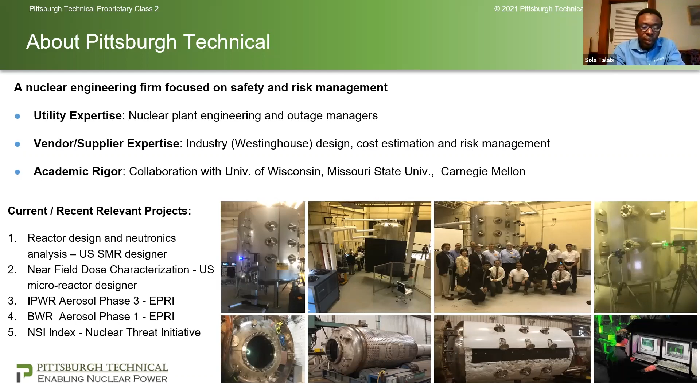Next slide, please. So for the project we're going to present on, the effort really has some significant context to it that we want to lay the ground and explain. One of the things we like to say is that we never want to do work that just sits on a shelf. So a lot of the research we do is driven by industry need, industry demand. And the industry demand here for this project is an ongoing effort to right size the concept of emergency planning zones for advanced reactors and small modular reactors.

As you may know, the Nuclear Regulatory Commission currently mandates two emergency planning zones. One is called the plume exposure pathway, which is approximately a 10-mile radius around each reactor site. The EPZ is the area where you need to have predefined and established actions in response to a potential accident. Some of the actions that can be taken within the area include whether or not you shelter in place, whether you evacuate people, having potassium iodide provided to inhabitants of the area, having special training for emergency facilities that are in the area, etc. So there's a significant cost actually associated with having an emergency planning zone.

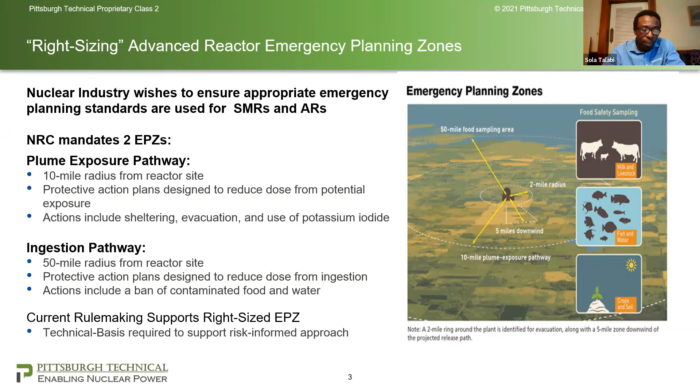And it's one that is necessary, but it should be risk informed, and the size should really be based on the risk profile of the plant. You don't need it to be any bigger, and you really don't want it to be smaller than it should be. It should really be informed based on the actual risk. So it doesn't make sense for a 1,000 megawatt plant and a 50 megawatt plant to have the same emergency planning zone size. But the way the regulations are currently written, it's one size fits all. So there's certainly a need to right size the emergency planning zones for advanced reactors and small modular reactors, to make them more competitive. Next slide.

So again, the context of this is within the potential deployment of a particular type of advanced reactor or small modular reactor, which is the integral pressurized water reactor. I'm sure that folks in the audience are familiar with the risks posed by a potential nuclear accident, which is the release of fission products. But one of the objectives of the containment vessel in a nuclear reactor is to ensure that in the event of an accident, those radionuclide particles that are aerosolized are contained.

So small modular reactors, and especially the IPWRs, have certain features that support the retention of fission product through naturally occurring phenomena. One of the ways we are able to demonstrate a different risk profile for these small modular reactors is to try to quantify the potential increase in retention capacity of these reactor types in the event of an accident, fission product. So that's really the objective of the study: to look closely at this reactor type, integral pressurized water reactors, and quantify the higher potential for retention, or as it's called, decontamination.

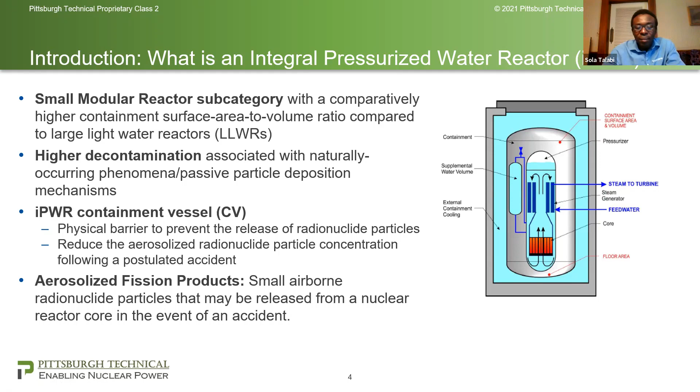Next slide. So the research was supported both by the Electric Power Research Institute and the Department of Energy. As we've stated, the motivation is to support right-sizing of emergency planning zones by quantifying passive decontamination factors associated with IPWR containment vessels.

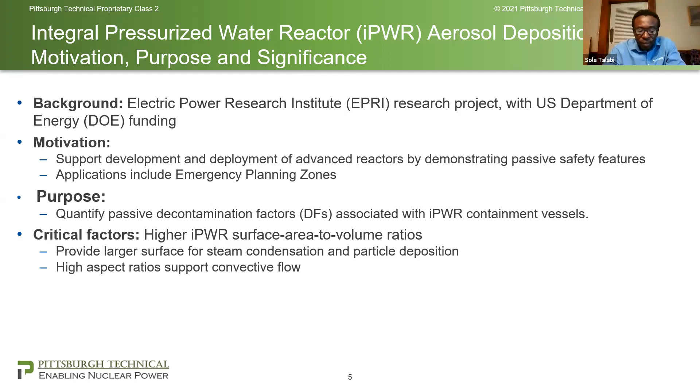Some of the critical factors here are the fact that there's a higher surface area to free volume ratio, and that ratio is significantly higher. So per volume, there's more depositional surface that these IPWRs have than large light water reactors have, even though they're significantly smaller, but the ratio of the surface area to free volume is significantly higher.

Next slide. So in terms of some of the significant benefits and impact here, some of the available methodologies and available data are largely based on large light water reactor technology, and as we'll show in a subsequent slide, these don't really scale appropriately.

And in terms of the impacts and benefits, as stated, the cost of maintaining an emergency planning zone is significantly high. So to support the development and deployment of these reactors, we really have to sharpen our pencils in terms of safety analysis and make sure that in various areas we're characterizing safety margin and ensuring that we're not being overly conservative to a point that it makes it too expensive to deploy the reactors.

So there is certainly an economic imperative here to support the development and deployment of these reactors by ensuring that the actual risk profiles are understood and that the safety requirements match up with the expected risk profiles. Next slide.

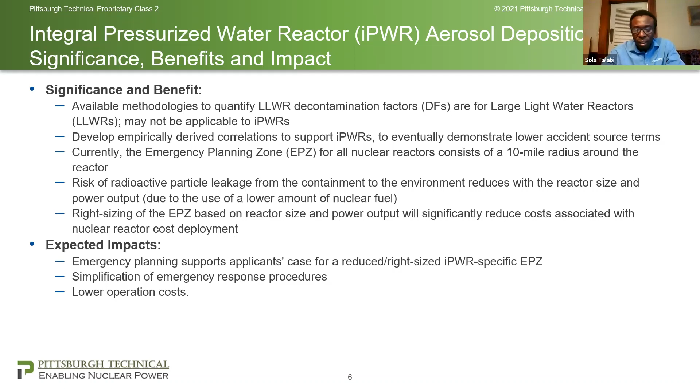So we've stated the objective, and just to explain the approach at a high level: to quantify the risk profile here, without going into too much detail, at the end of the day it's really a question of understanding how much potential fission product is released from a reactor in the event of an accident and how far it travels. So it's the dose-at-distance relationship that we're really trying to understand.

And based on that, the EPZ, or emergency planning zone, is sized based on that expected dose at distance. So just notionally looking at the chart here, prior to this work, if we try to quantify the dose at distance, we would have the red line, and the approach is really to try to characterize a green line based on the actual risk profile that the plant has.

The red line is a sort of one-size-fits-all analysis that was done back about 40 years ago with NUREG 0396. You can look it up, and there's a characteristic dose-at-distance relationship for all plants in the US. But what we're saying here is that if we characterize the IPWR-specific dose-at-distance relationship, we'll expect to come up with something that looks more like a green line. And then based on that, we can size what the appropriate emergency planning zone should be with these reactors.

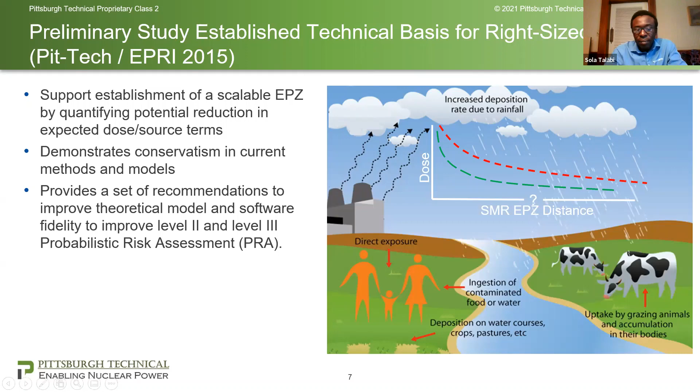As I mentioned, one of the critical parameters is the relative surface area to free volume ratio. And based on that relationship, that directly ties to the expected decontamination potential that a reactor has.

Currently, the data that we have is for large light water reactors, because that's all we've ever had in operation. So we understand the relationship we see in the lower left corner between large light water reactor surface area to volume ratio and expected aerosol decontamination factors, because there's a direct relationship between those.

But what we're trying to characterize is the regime in the upper right corner for integral pressurized water reactors. And that's where the focus of the study was.

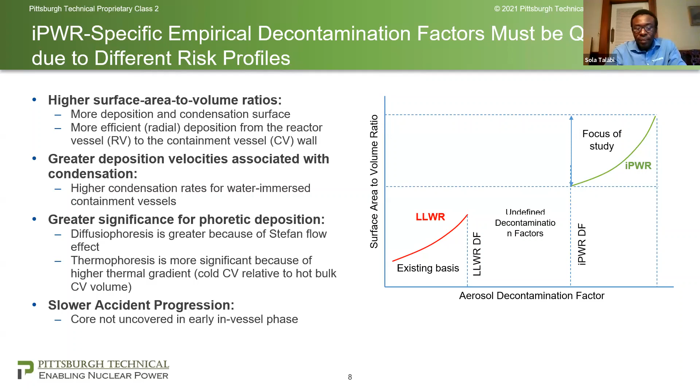So to summarize the series of studies we did to characterize the risk profile, the first was a feasibility study, which was an assessment to quantify IPWR decontamination factors. That study was done by Sandia National Labs.

The objective of that study was to identify the appropriate theoretical models, theoretical constructs that would be required for further analysis, and also to identify the applicable depositional phenomena that would be affected by IPWR specific characteristics.

Then in phase 2, we came in because we're a little less expensive than Sandia, but also fortunately we had a team that could do the work. One of the challenges, as I'll explain later, is that there was a very tight schedule and very tight budget to get this work done, and we were able to come in and help out. So we quantified the IPWR specific decontamination factors.

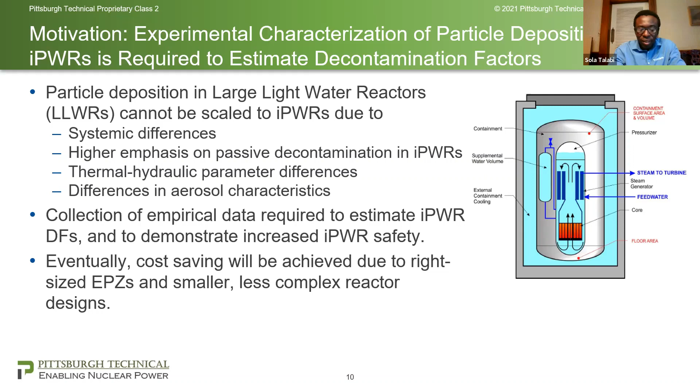So for this presentation, we really wanted to talk about some specific challenges. We talked about the background, the what and the why and the how, and now we want to talk about the challenges, the unique elements here.

We thought this topic may be interesting to you as researchers, because research projects are never straightforward, and there are always specific challenges, especially with data acquisition, setup, limited resources, etc. So we wanted to share some of the challenges we had and how we tackled them.

The first is the fact that we really had limited opportunity to scale from available large light water reactor data. Also, the stakeholders had requested that they wanted us to have one-to-one scaling for our applications, because there have been some challenges with scaling, and to some extent it's science and art when it comes to scaling.

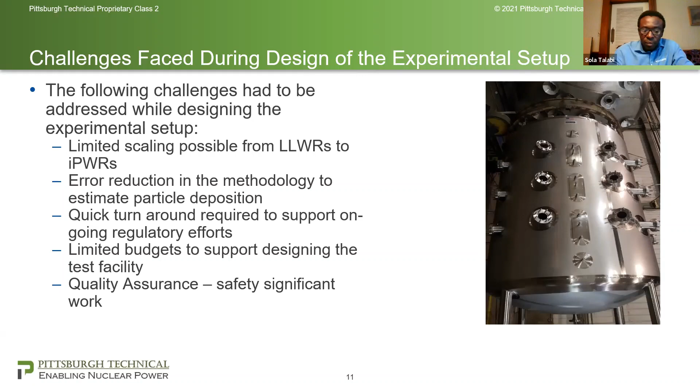How we tackled the challenges: because we had to do a one-to-one scale geometrically, we actually had to design, conceptualize, design, and build a test vessel, a containment vessel, to emulate actual accident conditions and acquire the data geometrically on a one-to-one scale. The test vessel you see is relatively large, but it has the surface area to volume ratio that's characteristic of the SMRs. It's an ASME certified IPWR containment vessel.

We designed, fabricated, and commissioned it in Pittsburgh. It's designed specifically for nuclear accident simulation. The overall schedule took 30 months for engineering, procurement, construction, and testing. So the entire program was completed from start to finish in about 30 months, and that included testing, the data acquisition, and report writing.

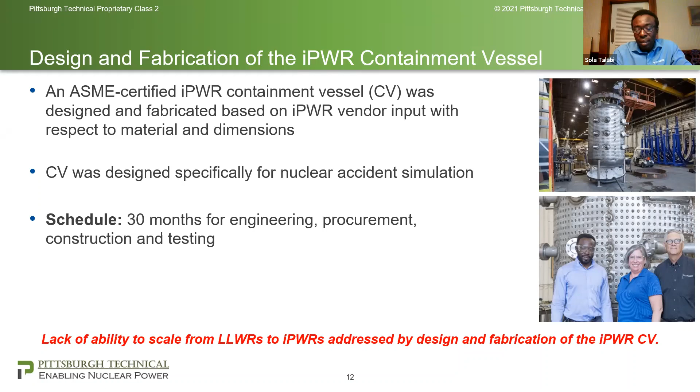One of the challenges also was to improve our data acquisition. Prior to this work, the prior art had used the coupon method to develop the expected rate of depletion of the fission product in the containment vessel. Essentially, the objective here is to quantify how effective the containment vessel is in decontaminating, or self-decontaminating, and reducing the amount of fission product in the volume. Prior studies would pressurize a vessel with the fission product simulant and periodically take out coupons over time, and based on the concentration of the coupon, you can develop your depletion curve. As you can imagine, that's an invasive process, and it's error prone, as one might expect.

So we used PIV, particle image velocimetry, and our understanding is that this was a first of a kind application for this specific type of work, given actual post-accident conditions. Next slide.

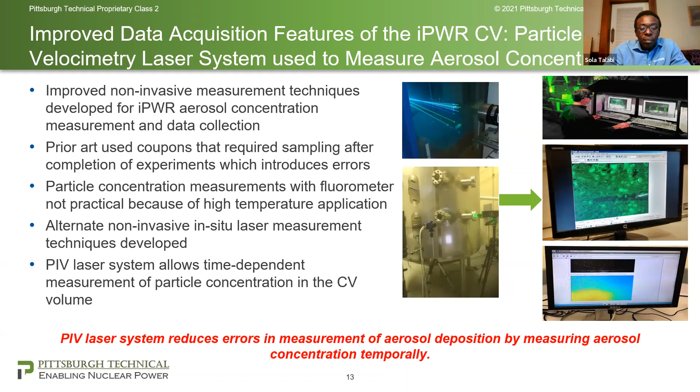The video you see shows the setup. Can you pause it for a second first, and let's explain the setup. For the PIV, essentially what we do is we shoot a high intensity laser into the vessel, and we take pictures over the depletion period using a high speed camera. What you're seeing is the laser setup and the high speed camera, both looking through viewports. There's a viewport where the laser shoots into the instrument vessel, and there's a viewport where we take pictures. So you're looking at both the camera and the laser here.

And we're able to characterize the rate at which the pressurized aerosol within the vessel is depleted over time. So it's really the change in concentration over time. Pictures start with a high concentration, it gets depleted, and based on that, we can develop a depletion curve. So the images that we get from the PIV are then post-processed to estimate particle concentration in the CV.

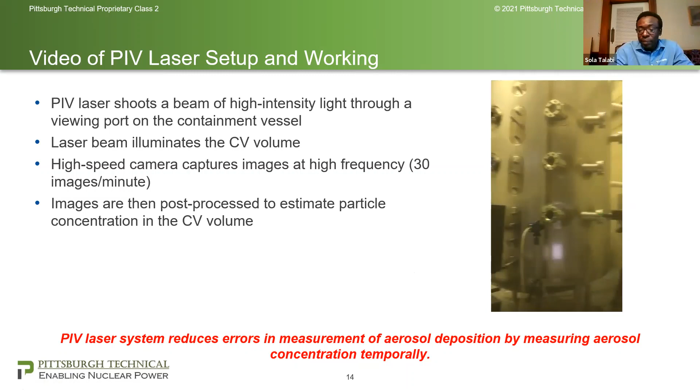So also we have improved data acquisition by the use of various sensors for temperature, pressure, and humidity. It's thermocouples fitted into thermowells in the vessel, various pressure gauges, transducers, and humidity sensors.

The reason we need to get all this thermohydraulic data is the phenomena of interest, which include phoretic processes like diffusiophoresis and thermophoresis, which are very much dependent on the thermohydraulic conditions. Thermophoresis is phoretic transport based on thermal gradient, and diffusiophoresis is based on a steam concentration gradient. So we needed data acquisition methods and equipment to measure all the applicable conditions within the vessel.

What you're seeing here is a cross section of the vessel showing the thermowells, and in there is where the thermocouples go.

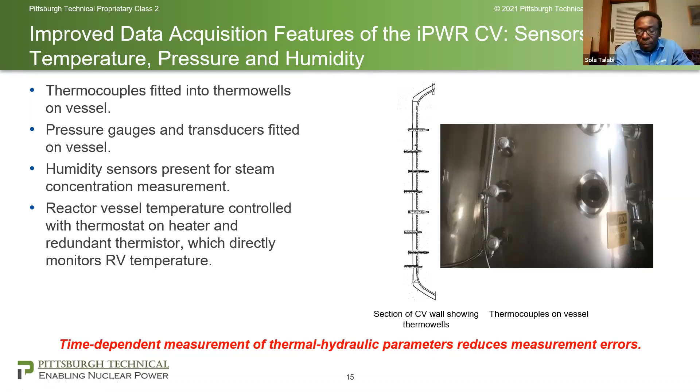Other special vessel design features include measurement of the thermal hydraulic parameters and particle concentration. The vessel has relatively smooth internal walls with a 32 RA finish to reduce effects of surface roughness, which could affect the flow and measurement. Also, it's stainless steel to prevent corrosion.

You can imagine the size of the particles we're measuring are really those within the respirable range, so within 1 to 10 microns. So the vessel itself has to be very clean. We want to make sure that we're not tracking or measuring anything other than what we put in, and so we can't afford to have any kind of dust, crud, or foreign material. Hence, it's stainless steel and a very, very clean vessel.

Again, it's designed to withstand the PWR accident pressure of 200 psi and temperatures up to 500 Fahrenheit. There are viewports included for the PIV laser measurements, as mentioned, and sampling ports included along with a high pressure sampling valve for optional external particle analysis.

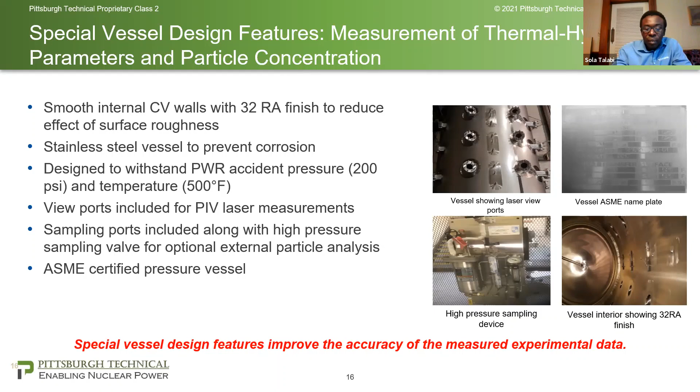Also, simulation of real-world iPWR deployment scenarios. One of the requirements was that, as you may know, some iPWRs, such as the NuScale iPWR, are designed to be immersed in water. And that obviously creates potential condensation on the containment vessel walls, which drives the diffusiophoretic velocity of particles.

So we wanted to be able to emulate that condition and also emulate dry conditions, because some iPWRs are in dry environments. We also wanted to understand the effects of going from an immersed condition to a dry condition over the transient. So the containment vessel has an outer jacket that can be pressurized with water to emulate conditions of being immersed in water.

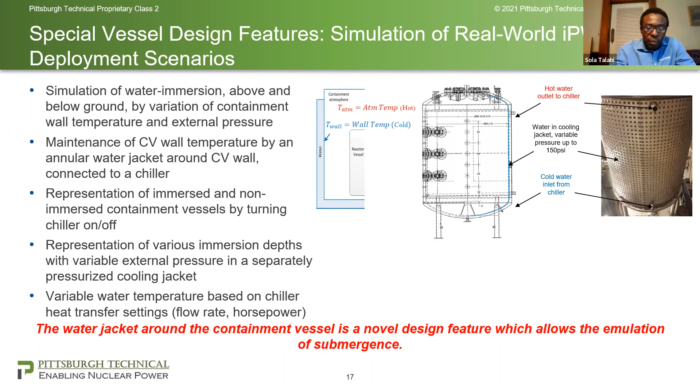Also, because the studies are parametric, because we're trying to really understand relationships, all the critical parameters had to be varied: varied temperature, varied pressure, varied geometric conditions, including the relative surface area to volume ratio.

The way we did that was by changing the free volume inside the containment vessel by putting larger, basically reactor vessel cylinders. So we have a cylinder that represents the presence of the reactor vessel. By changing the size of those, we can essentially change the relative surface area to volume ratio. That's also one of the unique aspects of this study, that we're able to vary these parameters.

What you see here are the various inserts that we put into the containment vessel to emulate the presence of different sized reactors within the same containment vessel. This shows you basically just how we do that by having various reactor vessel sizes. We change the surface area to volume ratio, and we capture a range of 0.6 to 0.75 per foot.

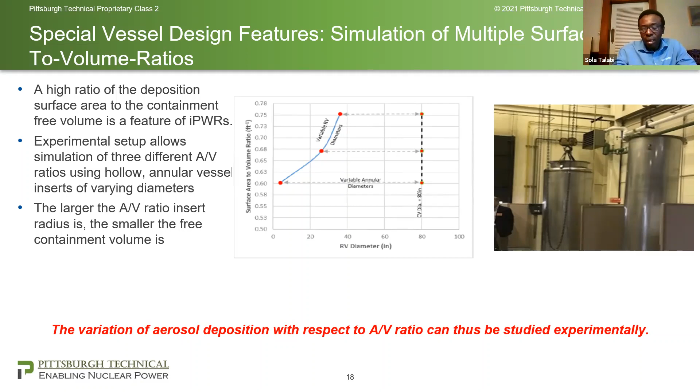Some of the additional design features allow demonstration of phenomena common to containments with high surface area to volume ratios, including natural convection cooling, characterization of steam concentration in containment based on rates of pressurization and condensation, characterization of accident progression rates related to containment vessel pressurization, and simulation of high and low containment pressure environments to study variation of aerosol deposition rates with pressure.

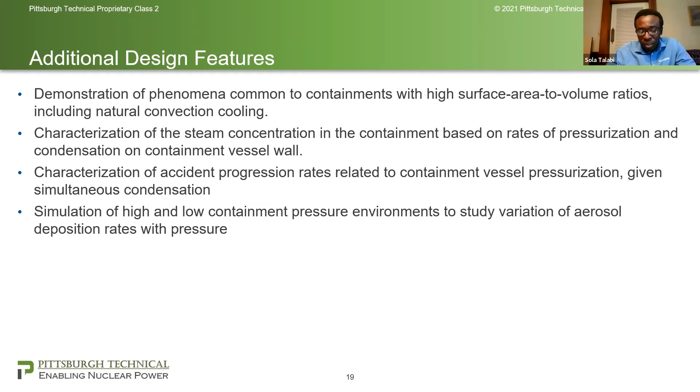Some of the other experimental equipment we have includes steam generators that are used to generate and pump steam into the vessel. We have an electric immersion heater that represents the heat generated from the reactor vessel, and then other equipment to develop the appropriate thermohydraulic conditions, including air compressors, etc.

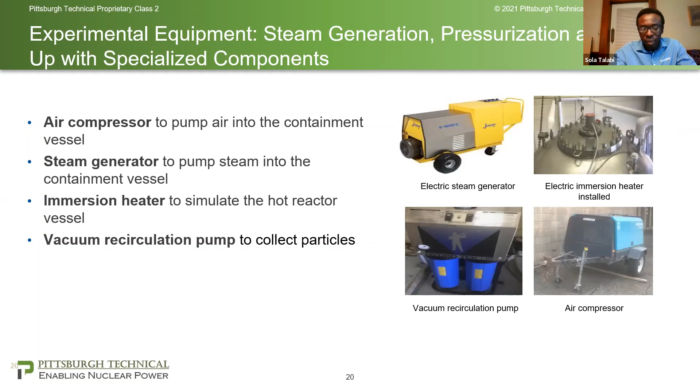One important aspect is the simulant we use to represent the fission product, and so we use nickel, and there are a couple of reasons why. First, the input we got from the IPWR vendors was that the reactor vessel material largely consists of steel. The difference between IPWRs and large light water reactors is that the containment for IPWRs is a stainless steel liner, while large light water reactors have concrete and significant debris. So your inventory for large light water reactors includes concrete and debris, making your final aerosolized particles relatively lighter. It's not just metals from the reactor, you have all the additional debris in your agglomerate. For the IPWRs, the agglomerate is essentially just what comes out of the reactor, so it's generally a little heavier.

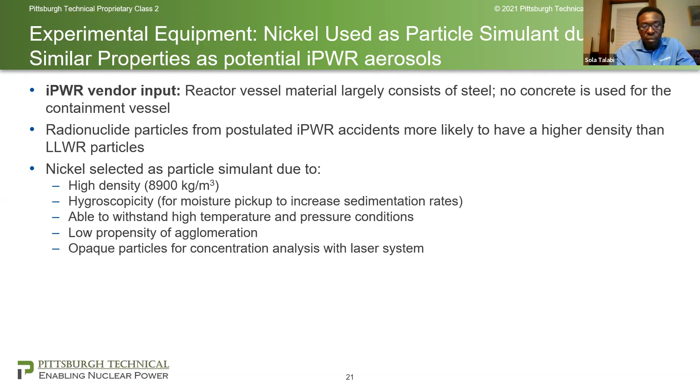This is just a P&ID of the setup we have. You see the various components, the containment vessel here, that's a reactor simulant in there, various data acquisition equipment, thermocouples, etc. We have the computer hooked up to the PIV system that does the data processing, and we have the rest of the system here to maintain and regulate the thermohydraulic conditions, etc. Also a lot of safety-related features here, rupture discs, etc., for blowdown.

Safety features. Next slide.

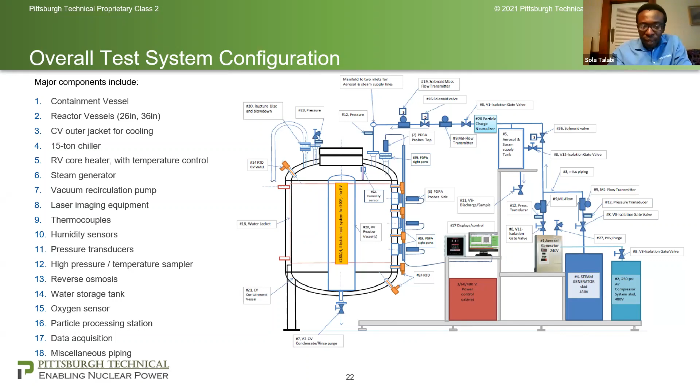And that's just again an overview of the lab. Some of the Pittsburgh technical staff, and in this picture we have folks from the NRC and DOE who had come down to sort of kick the tires on the system, and some Carnegie Mellon University faculty also, and even some folks from NuScale who had come down to kick the tires on the system and observe some of the experiments in progress.

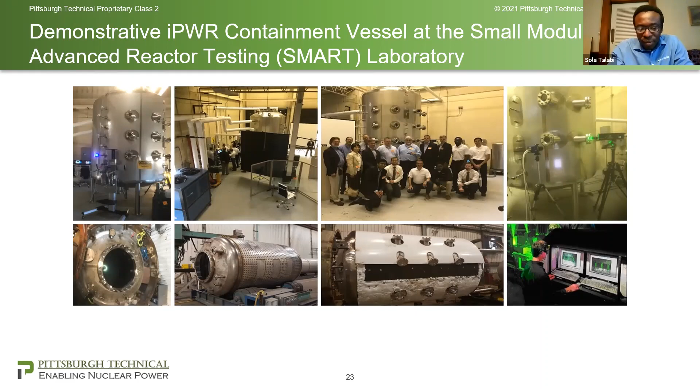I also wanted to touch on quality assurance. As stated, because this is safety significant work, we had to meet certain NQA-1 type requirements here. So we went with what's called a graded approach for the quality assurance. This is also documented, where we had to establish critical parameters, those had to be tracked, critical equipment had to be calibrated, the materials, tests and equipment were controlled and maintained, and these records are all stored. I believe they have to be stored for about 10 years. So, again, all the QA requirements to support this type of safety-related work were done.

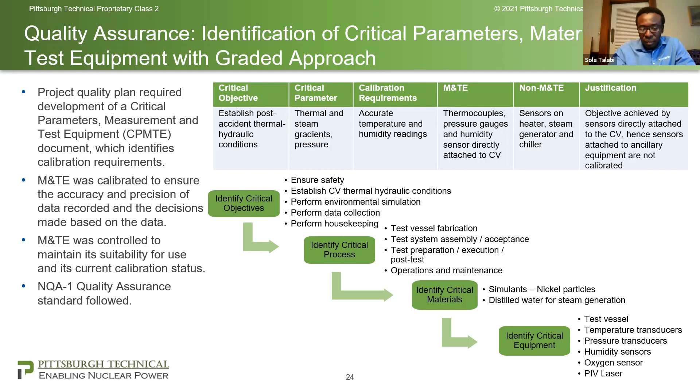At this point, I'll hand it over to Rohan to do the hard part. So thank you, Rohan, go ahead.

Yeah, thank you, Sola. Moving on to the experimental data that we collected throughout this study, there were several critical parameters that we varied. It was a parametric study, because obviously in order to characterize the effect of all these parameters on aerosol deposition, you need a parametric study within a certain range in order to make your conclusions.

The parameters that we varied were the reactor vessel temperature, the containment vessel wall temperature, and the initial bulk gas temperature, which was always taken to be equal to the reactor vessel temperature. Then we varied the steam concentration at the start of the postulated or simulated accident. When we say 0, it essentially means the conditions throughout the containment vessel are dry, while for wet conditions, to study the effect of diffusiophoresis, the mass fraction was 0.7. We also varied the initial pressure and, as Sola explained earlier, the area to volume ratio.

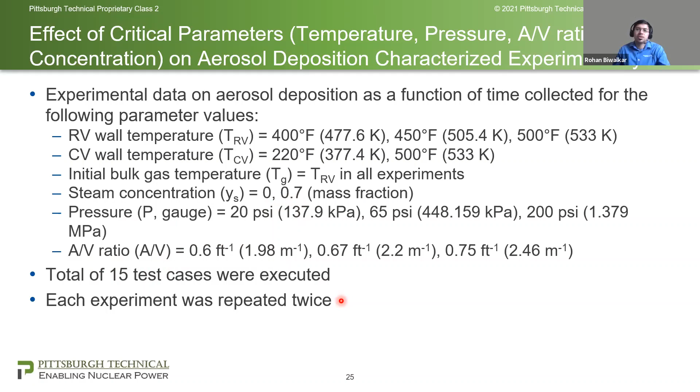A total of 15 test cases were executed, and each experiment was repeated twice, meaning 3 experimental test cases per case were executed, for a total of 45.

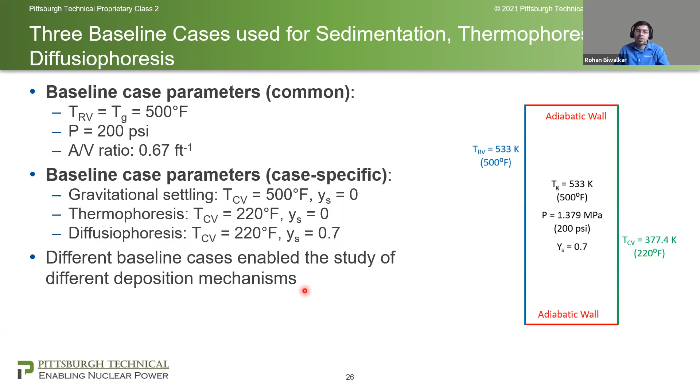When we study thermophoresis, that is movement of particles in the direction of a thermal gradient, we have a temperature of 220 Fahrenheit on the CV wall as opposed to 500 Fahrenheit on the RV wall. So there is a thermal gradient and there is still no steam. And in order to study diffusiophoresis, there is a thermal gradient as well as a steam concentration gradient, which is the result of steam condensation on the cooler CV wall as compared to the hotter RV wall. Thus different baseline cases allowed us to study different deposition mechanisms.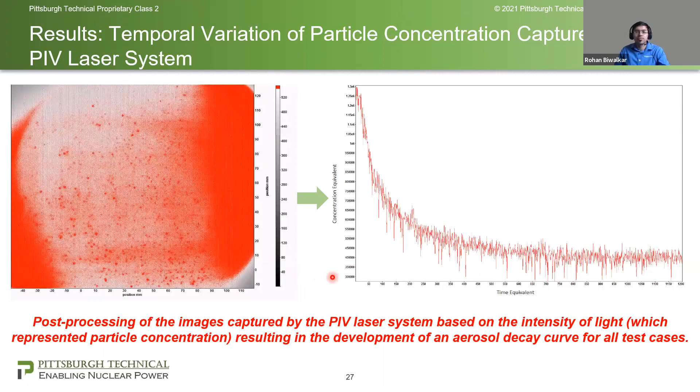One of the most important findings of the study was that convective flow, which is a result of the thermal gradient between the CV wall and the RV wall, as well as the buoyancy of the bulk gas, was identified as a significant decontamination mechanism. As you can see near the RV wall, the bulk gas is going to rise because it's hot. Near the CV wall, which is relatively cooler, bulk gas is going to descend, and that sets up this circular convective flow.

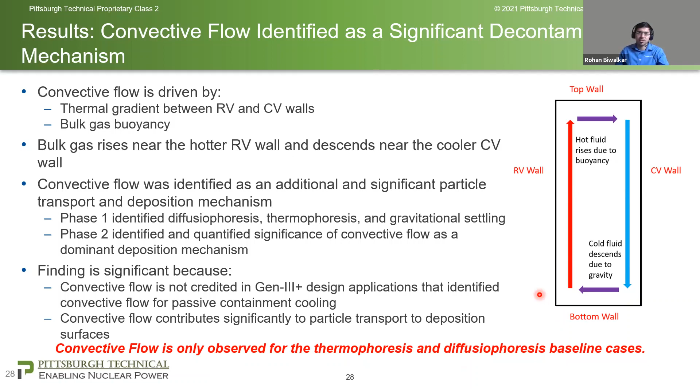In the phase 1 study, diffusiophoresis, thermophoresis, and gravitational settling or sedimentation had been identified as key deposition mechanisms. But in phase 2, we also identified a fourth one, that was convective flow. And that is extremely important because when there is a thermal gradient, it results in fluid flow or movement of the bulk gas, which in turn pushes particles to deposition surfaces. This is also significant because it's not been credited for particle deposition in Gen 3 plus design applications, and it contributes significantly towards particle transport. And of course, it was only observed in case of thermophoresis and diffusiophoresis for those baseline cases and others, because in case of gravitational settling, there is no temperature difference between the RV and CV walls.

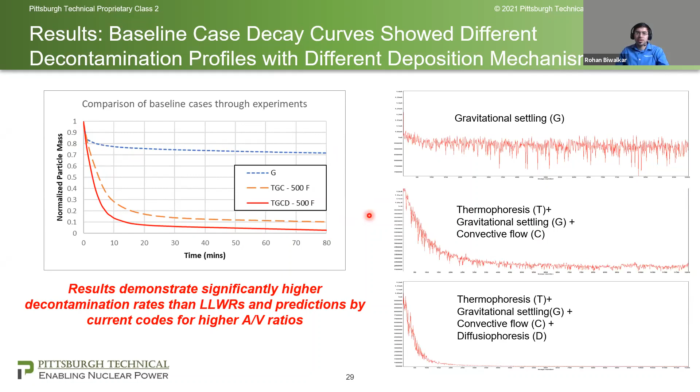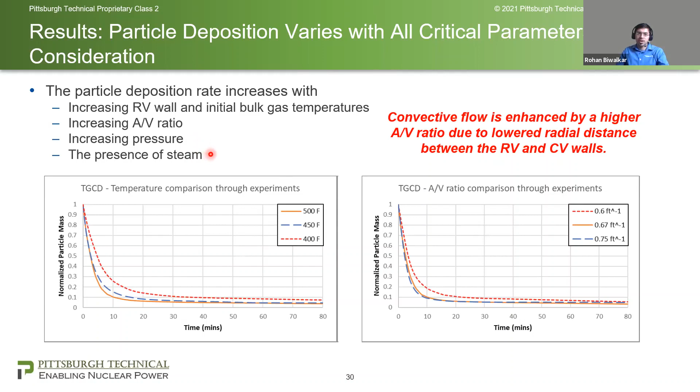Also, presence of steam enhanced particle deposition, as we saw from the previous slide. And with an increase in pressure, the same was seen because at higher pressure, steam condensation rates are higher, and that results in faster diffusiophoresis.

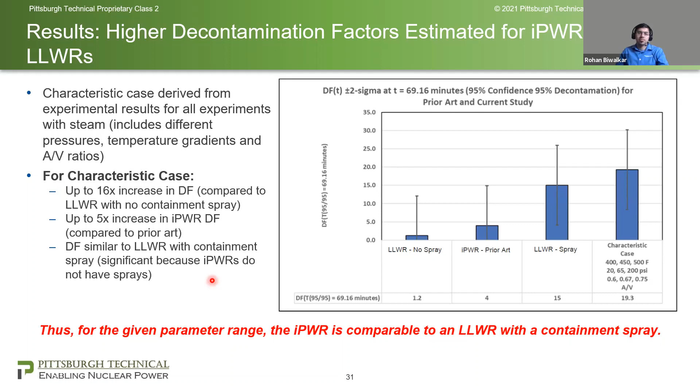A little more on the statistical analysis: we found that at a time of 69.16 minutes, there was a 95% confidence level that 95% of the particle decontamination had taken place, and the decontamination factor at that particular time was 19.3.

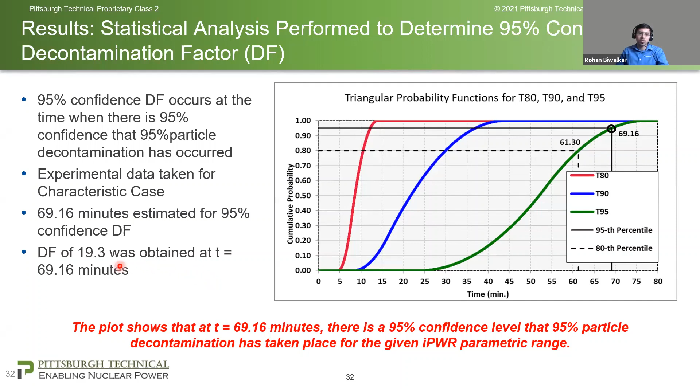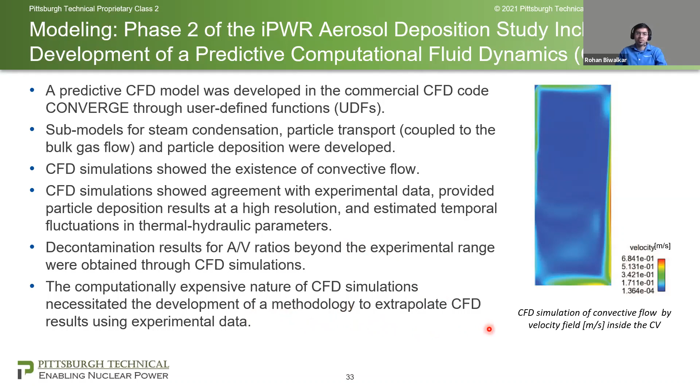So the technical conclusions from this phase 2 research: the most significant finding is that the IPWR DF, the average DF under consideration, is comparable to an LLWR DF with a containment spray.

We found that convective flow is a strong particle transport and deposition mechanism, and that particle deposition rates increase with increasing RV wall and initial bulk gas temperatures, increasing AV ratio, increasing pressure, and also in the presence of steam. Plus, we found that the CFD model showed good agreement with experimental data, but it was computationally expensive.

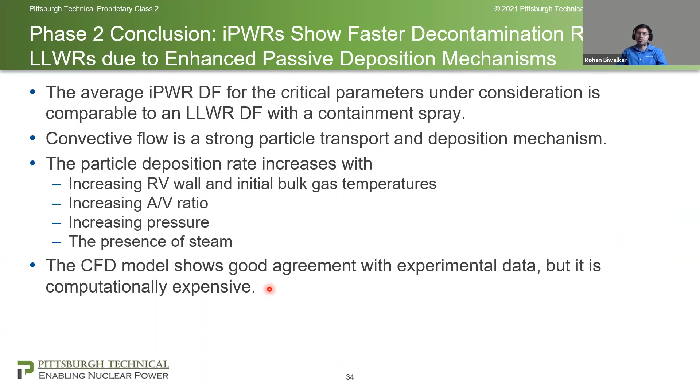Touching upon the research carried out beyond phase 2, a lot of recommendations to investigate some additional phenomena were made at the end of phase 2 by our stakeholders.

That's why we embarked upon additional research for characterizing more phenomena, like particle resuspension, agglomeration, and deposition by impaction, as well as the effect of pressure fluctuations, and other conditions such as a thermal gradient on the CV wall, and what if the CV top surface, the containment vessel top surface, was uninsulated? In phase 2, the top surface is insulated, but what if that were absent?

Also characterizing the effect of the presence of large particles with a diameter beyond 10 microns, which was the range in which we had simulated and experimented upon particles during phase 2, and also the effect of a non-uniform initial particle distribution.

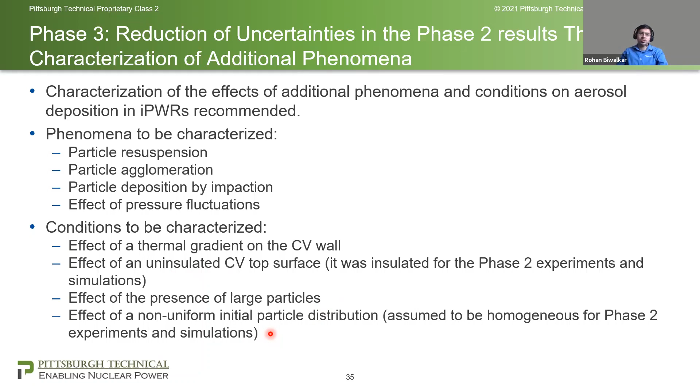A homogeneous particle distribution was assumed for the CFD simulations as well as for the experiments. Part of this phase's research was to investigate what happens if the initial particle distribution is not homogeneous. We characterized these phenomena through experiments as well as some modeling.

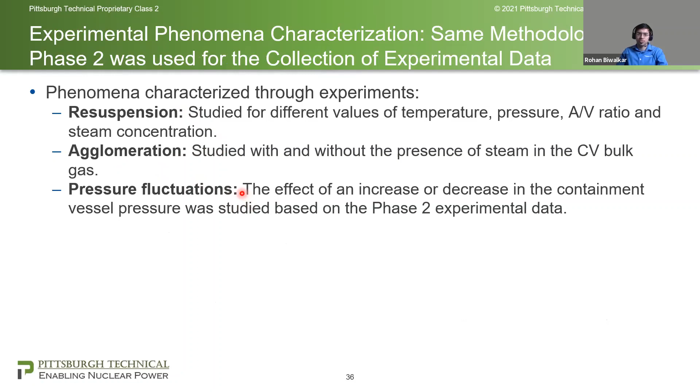Experimentally, we characterized resuspension and agglomeration, and studied our phase 2 data to understand the effect of pressure fluctuations. For the modeling, since the CFD model was computationally expensive, we developed a more simplistic V&V code in Python for faster simulations.

Since we had a lot of insights from the CFD simulations, it made sense to use those while developing this new code for faster calculations.

The insights we used were the stratification of the CV volume into different zones where different phenomena are in effect. For instance, the dew point temperature plane is very significant, because only between the dew point temperature and the CV wall is there a steam concentration gradient, and that is where diffusiophoresis is going to take place. Throughout the containment vessel, between the reactor vessel wall and the dew point temperature plane, there will be a very negligible steam concentration gradient.

So diffusiophoresis will not be active there.

We also found through CFD that the thermal gradients near the RV and CV walls were steeper than those throughout the containment. Existence of convective flow was a key finding, as was the evaluation of particle deposition velocities throughout the CV volume. So all these calculations are not made just next to the CV wall where most of the deposition takes place, but throughout the containment vessel volume. This code was validated against experimental data.

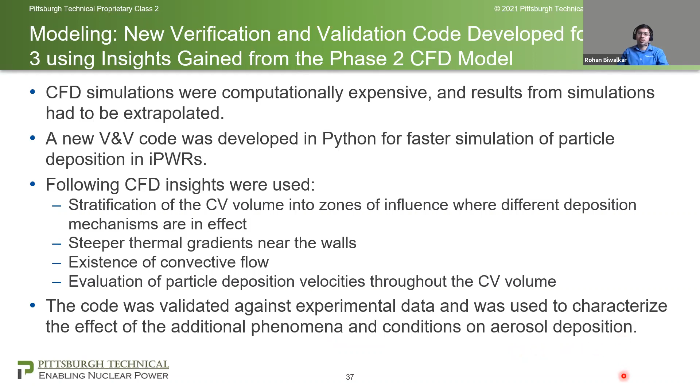And also used to characterize the effect of additional phenomena and conditions on aerosol deposition. So through modeling, we also characterized impaction. We characterized the effect of the initial particle distribution by studying some heterogeneous particle distributions, and we also studied the effect of the thermal gradient on the CV wall.

This was studied due to some stakeholder feedback, where we were asked to investigate scenarios in which the IPWR is not fully submerged, but rather partially submerged. This may result from the way it was set up or deployed, or from the sink in which it is submerged losing water due to an accident. And also, what if it is not submerged at all? What if the deployment is in a dry environment? So we simulated that as well.

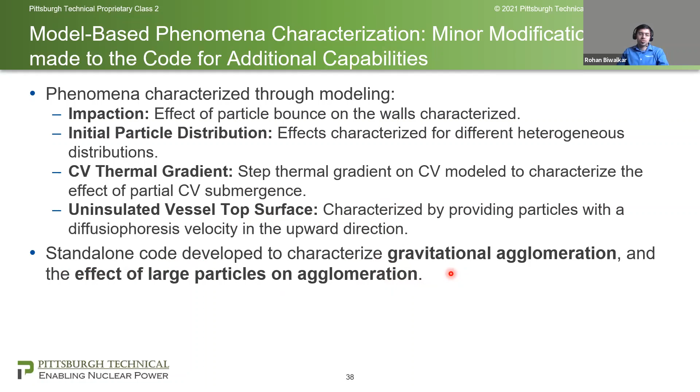The effect of the uninsulated vessel top surface was also characterized. And in order to study gravitational agglomeration and the effect of large particles on agglomeration, a standalone new code was developed, which was even more simplistic than this V&V code used to characterize the other phenomena.

What experimentally we were trying to find was when this occurs. So we found that it occurs in the presence of a thermal gradient, is unaffected by pressure, and does not occur in the presence of steam. This supports the theory that resuspension is highly dependent on convective flow, because convective flow is what occurs during the presence of a thermal gradient between the RV and CV walls.

For agglomeration, we did not find any experimental evidence of agglomeration during the post-accident deposition phase, because theoretically most of the agglomeration takes place before the deposition phase. Through our study of the phase 2 pressure fluctuation data, we found that if pressure increases during the deposition phase, steam condensation is enhanced, and if pressure reduces, steam condensation rates are also reduced, and they both directly affect particle deposition.

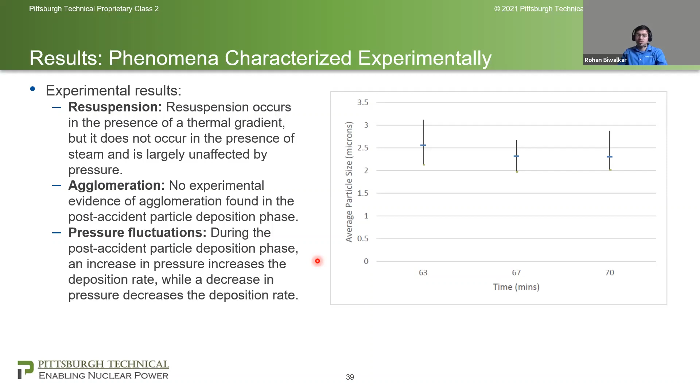Using the phase 3 V&V code, for agglomeration using the standalone code, we found that gravitational agglomeration has a very negligible effect on particle deposition. As far as impaction was concerned, we studied it through the characterization of particle bounce, rather than assuming that if the particle hits the wall, it deposits immediately. Using this probability of particle bounce, we were able to characterize impaction. We found that it increases with an increase in steam concentration, but this model does not take into consideration the effects of surface adhesion, which will result in more changes.

The effect of initial particle distribution was studied with a heterogeneous distribution where particles were skewed towards the top half, the top region of the vessel, and we found that it does cause differences between the overall decay curve and the decay curve in the case of a homogeneous distribution assumption.

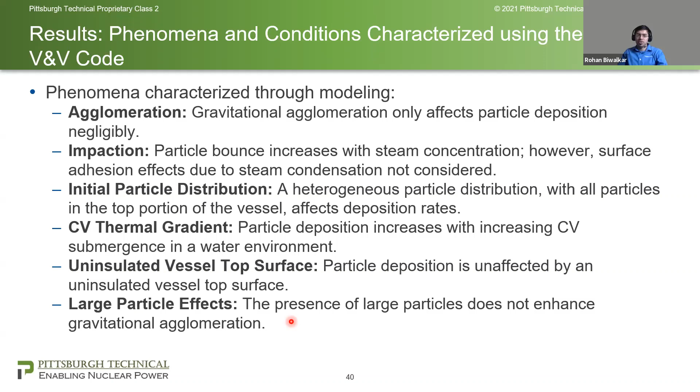For the CV thermal gradient, we found that as the CV submergence depth increases, particle deposition rates are enhanced, which makes sense with the theory, because increasing the depth means activation of diffusiophoresis due to steam condensation on the CV wall in those regions. We found that if the vessel top surface is uninsulated, it does not significantly affect particle deposition. And as for large particles, it does not enhance gravitational agglomeration. This is probably due to large particles just dropping off very quickly. If your particle diameter is higher than 10 microns, they don't take much time to drop off from the top of the containment volume straight onto the bottom surface.

So, conclusions from phase 3: we received a lot of insights into the phenomena that were modeled, additional phenomena that were modeled and characterized.

We received insights into how each of these phenomena affect aerosol deposition. We found that the modeling of resuspension is critical since it is driven by thermal gradient, which drives the convective flow. As for uncertainties in the experimental data, we found they were due to the measurement devices, since all the experimental data was collected with all phenomena being in effect.

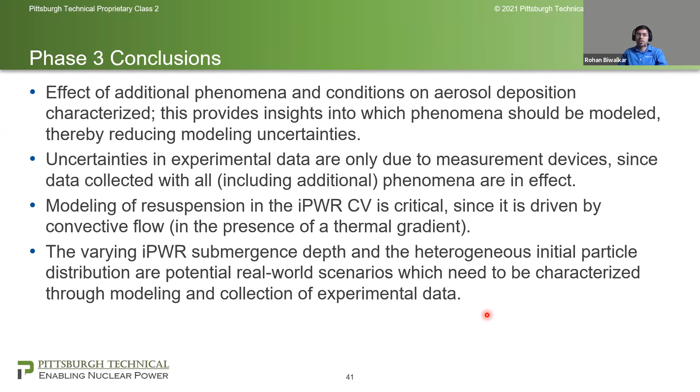Finally, varying IPWR submergence depth and the heterogeneous initial particle distribution are both potential real-world scenarios which have to be characterized through either modeling or collection of experimental data in order to really study and understand their effects on aerosol distribution. And with that, I would like to hand it back to Sola for the final slide.

Thank you, Rohan. So we presented, we started with presenting the overall objective of characterizing the risk profile for IPWRs, and we explained the different phases, phase 1, phase 2, and phase 3 work, how we developed the theoretical models, how we verified and validated them experimentally, and the results.

We provided a comparison of the results of the decontamination factor that we get for IPWRs with just passive safety or passive mechanisms to a large light water reactor with active mechanisms such as sprays.

So that sort of tells us that an IPWR without any active mechanisms, just using passive decontamination mechanisms, can be as effective as a large light water reactor with active mechanisms such as sprays.

The importance of that is, if you're looking at say a Fukushima type event where the active mechanisms such as your pumps were rendered useless because of the tsunami, what this is telling us is that IPWRs have passive features that don't necessarily require those active systems, and so it makes it more resilient.

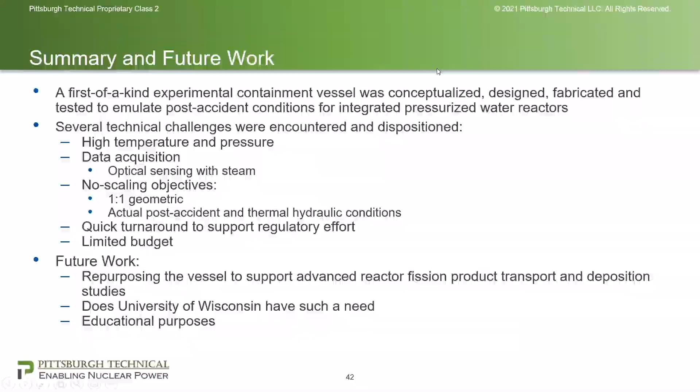Thank you very much. So hope everyone has a great day. Thank you very much for having us. It's a pleasure. Thank you.